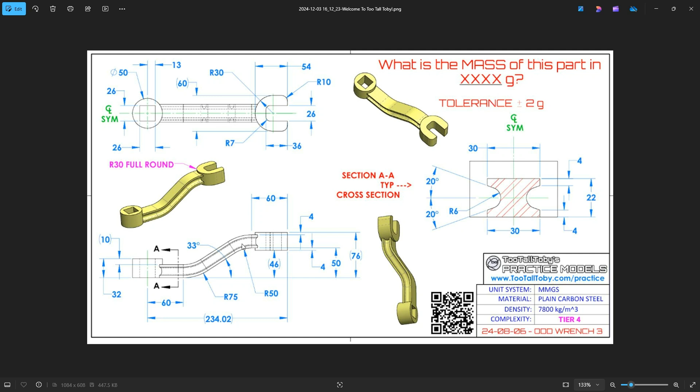This is not too awful complex, but it does involve some standard shapes that we'll use to place our start and end locations, and then we have to create a sweep path to basically create this model here in the top, or between the two, that has this profile on the right hand side. So not too over complex on this model. Just one key to mention is 234.02 to get this to work here smoothly with these tangents and everything. So let's just hop over to IronCAD and show you how this is done.

So this is the finished product of the model, so I'll just go ahead and show you how that is done. So I'm going to go ahead and delete that, and I'll start here.

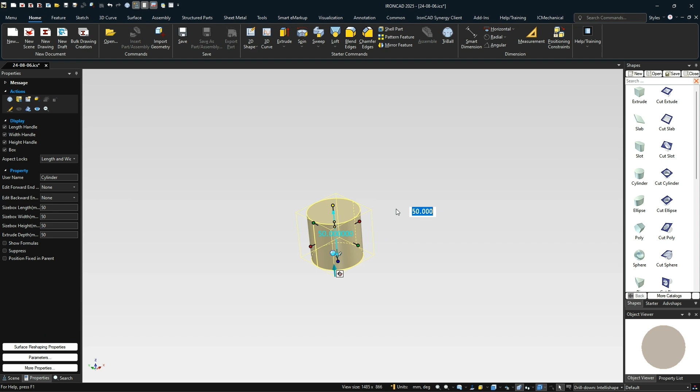So what I did to build this model is really just start with our catalog shapes, and I started with the cylinder out here to begin with, which is our base cylinder, which will give you a dimension of 50 for the diameter. The height of this is sitting at 32. So that gives us our starting point for that.

And the next, I'm going to drag and drop an extrude out here, and I'm just going to do a couple things here. I'm just going to slide it down here to the bottom, and I'm going to move this one. Just right click on that. I'm going to say go ahead and snap that to the center point of this, so it's aligned right in the center, and then we can set these values for this.

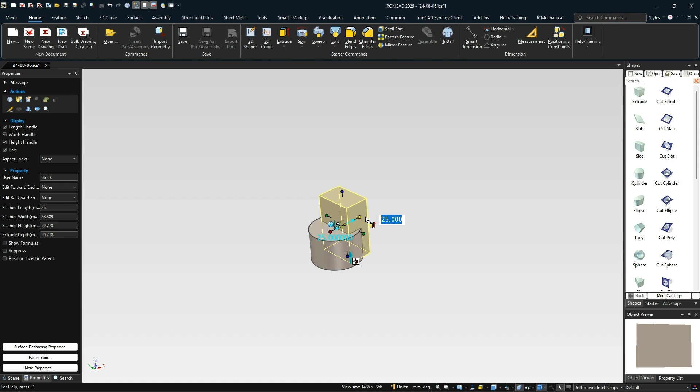So this cube, I'm going to actually move this one more time, so I'll show you why in a second. So this cube that they give you here is actually 54 long, so we'll go ahead and type 54 long, and in the width wise of this guy, we are sitting at, let me look at the dimensions here, we have 60 for the width, and the height of that guy is basically just a math formula of 76 minus 46. So that's our height for that thing.

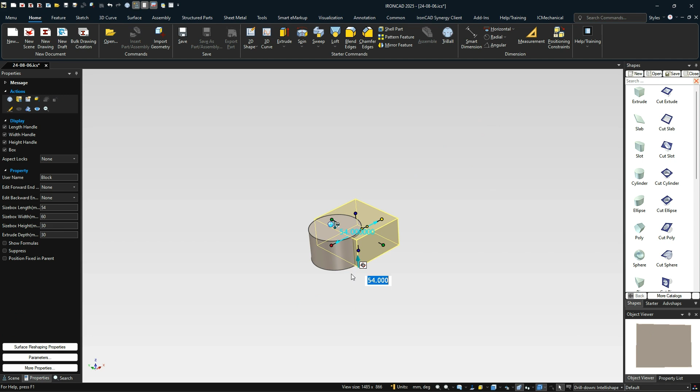So that's our block that we need to move out here to this new location. But the way this is positioned, it has that 234 from the center of this to the outside of this. So what I'm going to do is just turn on my tri-ball, and I'm going to move it down to the bottom edge of this part.

And I was going to do it an easy way. I just snap down to the bottom edge of this part, and I'm going to move it over to the far outside point here as well. And the reason I'm going to do that is I'm going to move this right back to the center point of this. So it's actually this one that needed to be on the center point, which we could have done initially. I just did the wrong direction. But anyways, we'll just continue on.

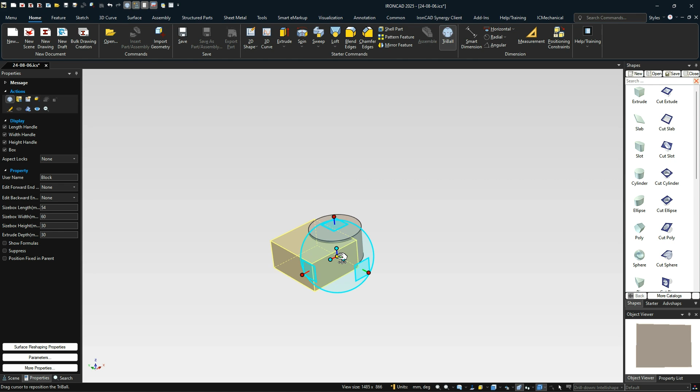So we've got this in the location where it needs to start, and then we just need to right click, move that out to the exact location that they give us, which is 234.02 for that dimension there. And it also, from the bottom of the ground to the bottom of the part, it is 46 units high, so 46 there.

So we'll go ahead and hit the 46 for that, because we've got our tri-ball at the bottom of this part, so the bottom to the bottom of this is 46. So that's an easy way to do that, or you could have done it from the top as well, to 76 from the top.

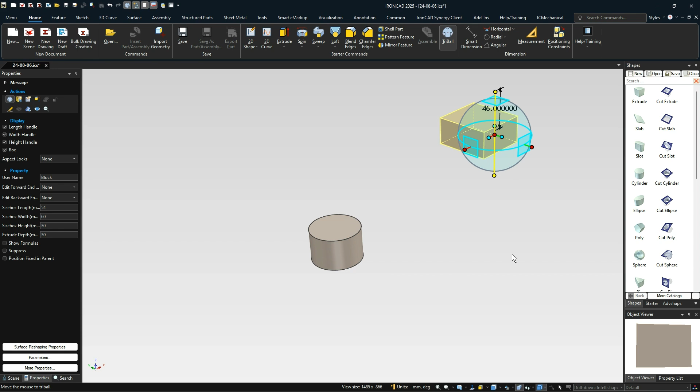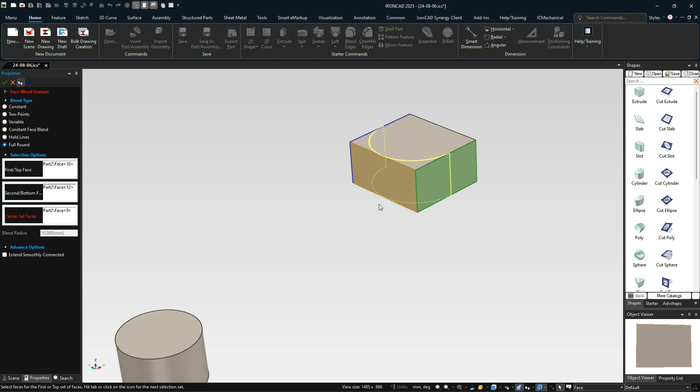So that's in the two positions that we have for this, and we can go ahead and add some other things that don't really matter here. So we can do these blends here, which actually are what they call a full round blend. So we have the top face here, and you hit tab, and I'm going to do a Control-Alt click to get to the other face there, to get the second face, and I'll hit tab one more time to get the center face. So that's just going to give us a 30, since this is 60 wide, that'll give us a 30 radius on that end there.

Next, these outside edges here are blended as well, so we'll just go ahead and put a blend on those, which have a radius of 10. So we'll just type in 10 for that one. And again, we can rotate around or just hit Control-Alt-click, and we're going to get that edge on the back side there. And we can say OK to apply that. So that will give us that shape.

So I'm not going to do the cutouts yet. I'll do those last, because we're going to build this model into here, because we have some dimensions that refer to that.

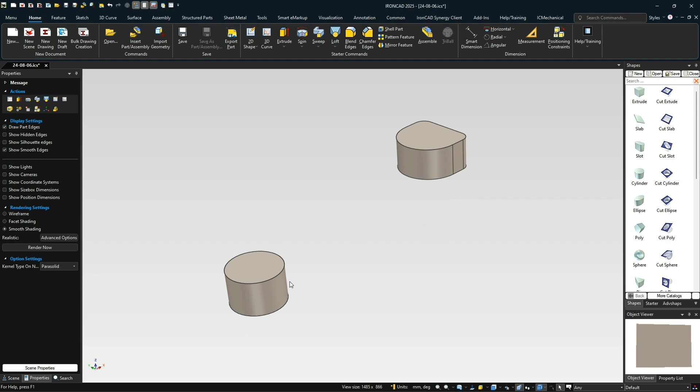So what we're going to do is create a 2D sketch for our path, then do our profile and sweep for this. I'm going to do a normal to face at this point down here, using the origin point at that location. So we've got the origin point here, normal to that face, and we can go ahead and hit OK.

This flips around, which is fine. We just rotate it using our look at tool, which is the F7 hotkey, or you can just click on it at the bottom there. Now we've got this the way we want it, and a couple things we know.

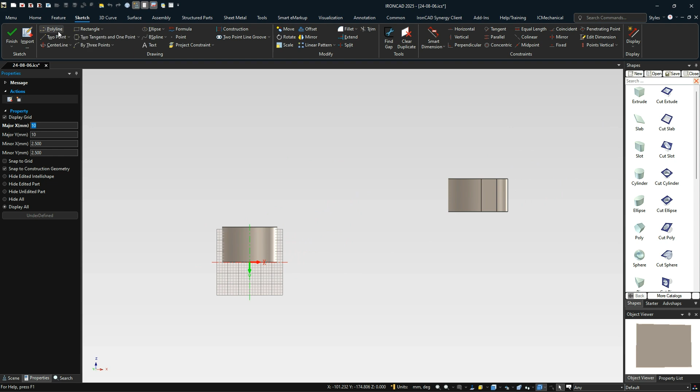First we'll go ahead and do 2-point lines here just to show this. I'll draw this line out here, and we know this side has a length of 60. We'll do the same from here, starting here—or you can move it if you like—and draw a line that's also 60.

One thing we know is this line has to be moved up. We're going to measure it from the bottom of that part. If we put a dimension from there to there, we want that to be 4 millimeters—that's the bottom of our profile to the bottom of this curve here. So that gives us our starting points.

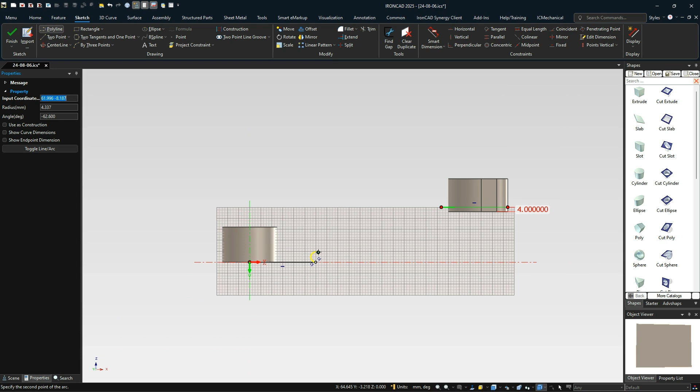Next we want to do a polyline. I'll pick our point and switch over to a toggle arc line, so we can draw this arc here. We move it out to draw like this, and place it up here by right-clicking on the mouse. The radius for that is 75, and the angle is -33. That gives us the location point for our first shape.

Next we want to draw that line from here, so we'll go ahead and draw this 2-point line. I'll just show you this—we'll draw that off, and you can see it gives us a tangency there. We draw it out to this location. If you want to do this with constraints, you can, or you can do it other ways.

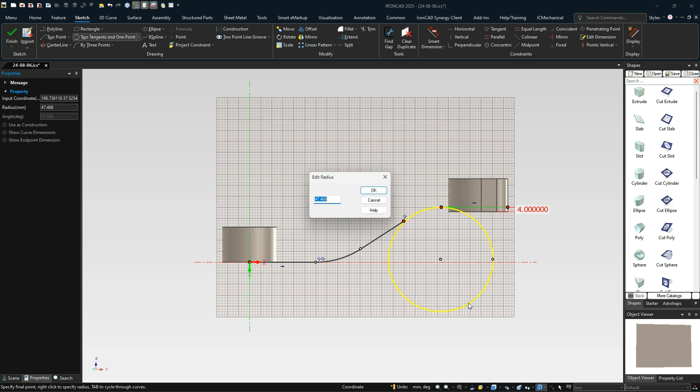But what we're going to do next is a 2 tangents and 1 point command—tangent to that curve and tangent to that. We move out here and right click, and the radius for this one is 50. That gives us that profile, and we can extend this curve, which should be tangent to that and connected directly to that point as well.

Now if we use our trim command right here, we can trim that arc so it trims directly where it needs to be inside there. You can put dimensions on this and add all the constraints, or just click on these to see the values for all this information. If you really want to, you can go and add all the dimensions just to show you've got this set up correctly—you don't have to, but it's good to set those there.

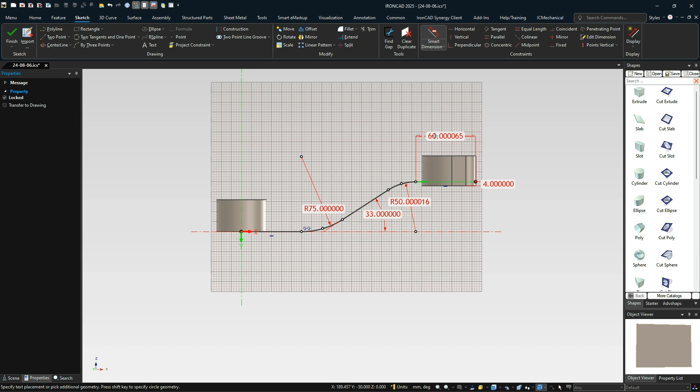It's just rounding to the nearest values outside of there, but anyway, those are the values for this. We can put this one on as well if you like—put the 60 on that too. I've got the tolerances pretty high at the moment. Oops, one more over here as well—we want not the point, we want the actual curve there. So you can see those values for the curve and profile. That is our path that we want.

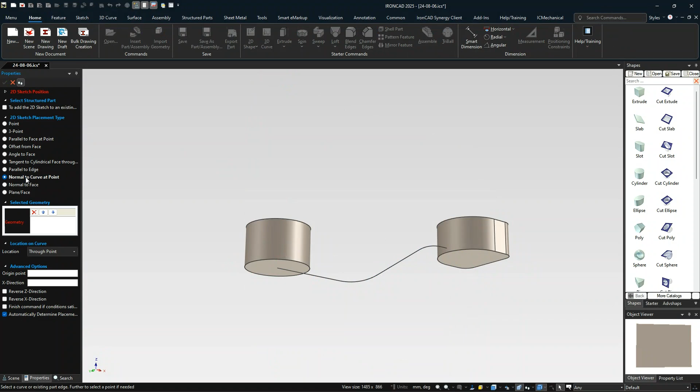So next we'll go ahead and hit finish to that. And next we're going to do another 2D shape, this time a normal to curve at point, selecting this curve. The easiest way to do this is to select down here and say arc length, which sets it to 0 and moves it right to the end for us, which is fine. We'll go ahead and hit OK.

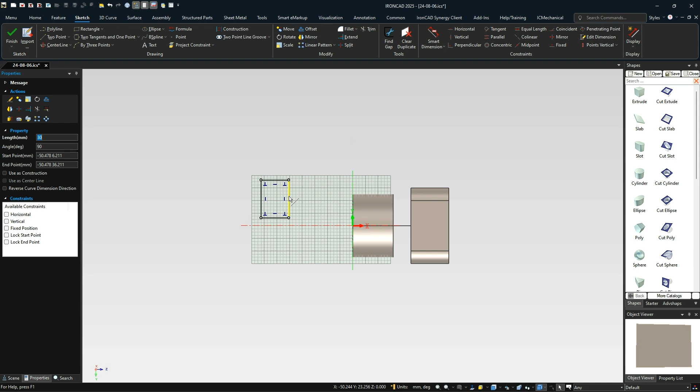The width on this is 22 and 30 on the side of this. This long edge here is our 30, and this is our 22 value. A couple things to note here.

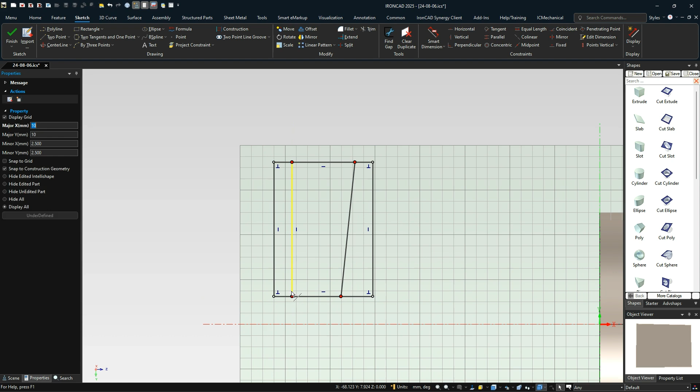There's 4 millimeters on each side of this, and it's at an angle from that location. So we're going to offset this 4 millimeters, selecting this curve here and this one as well to create those 2 profiles. Then we can simply drag these in a little bit, getting a hold of this one, and drag that one in as well.

What we can do is turn on curve dimensions if you don't have them on already. When you select on these you'll see the value there. So this one needs to be -110, and this one over here, we select this one, is going to be -70 to account for a 20 degree angle on each one of those locations.

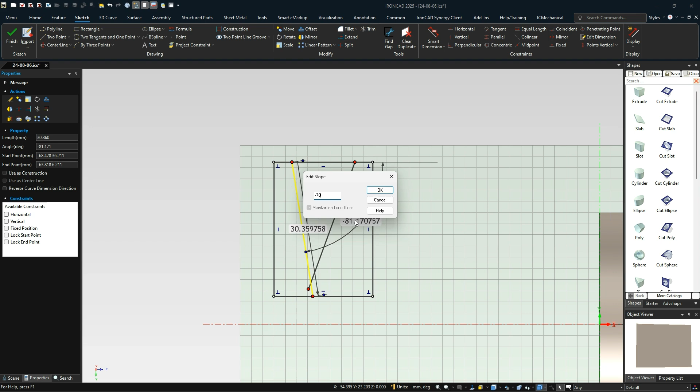Then we can just trim off these bottom 2 and add a fillet to our intersection point, which has a radius of 6 inside of there. So that's basically our profile that we needed to build, and we can trim off that middle section for that part. Now we just need to get this on the other end, so we can delete this profile.

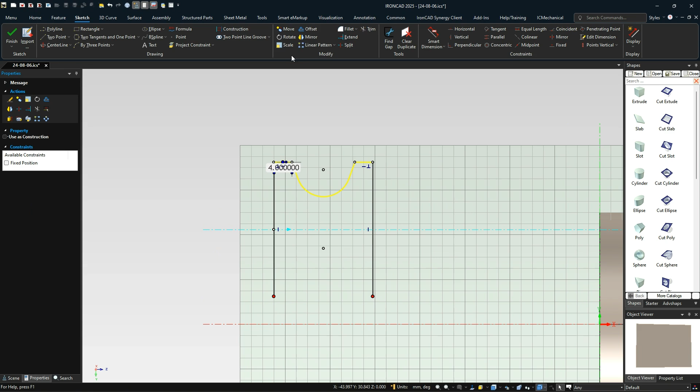We're going to actually put a center line on here first, right on the center of this midpoint here to there. Now we can do our mirror by selecting this, mirroring about this profile here. You can see the preview there showing where it's going. We hit OK, and that will give us our shape.

Now we can select all of this and use the move command. I'm going to hide those curve dimensions again so I can get my point. Move that down to this location, which is our start location, and hit finish.

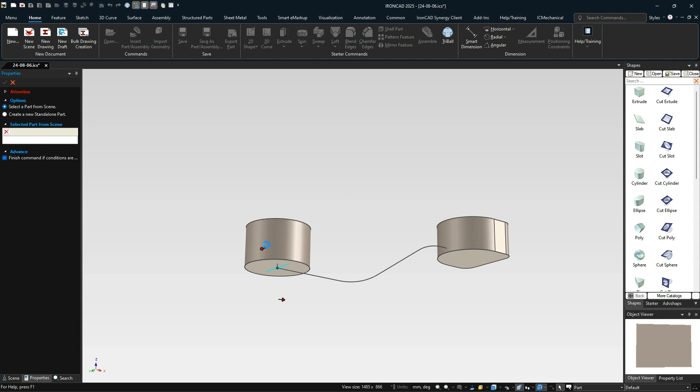That's our profile, and now we can do the sweep command, which will use this part as part of our part there. It's going to select our profile automatically since we had it selected, and we can change our guide curve to be this 3D curve we've created. That will create our shape for that model, essentially creating our sweep path and the smooth path on the bottom of this side.

Next we have to do just our last 2 cuts here, so we can drag and drop a cut onto this model. I'll just show you this - you can do it and extrude through, but we can do it in multiple ways, so we'll just drop this out here.

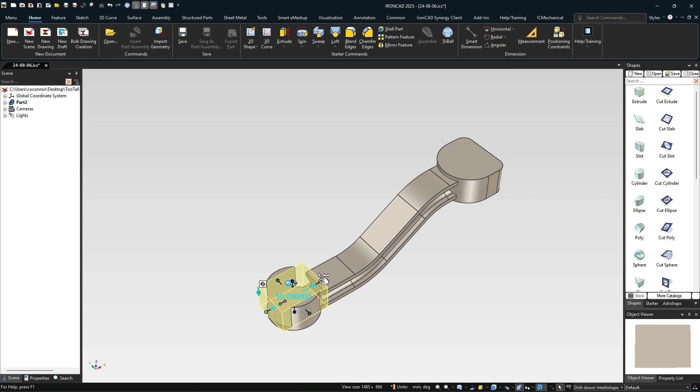We know this shape here has got a 26 by 26, so we can just right click and drag, type in 26, and do the same thing for these other handles, typing in 26. Either just pull this all the way through or snap it to the bottom side. So that's one for that shape.

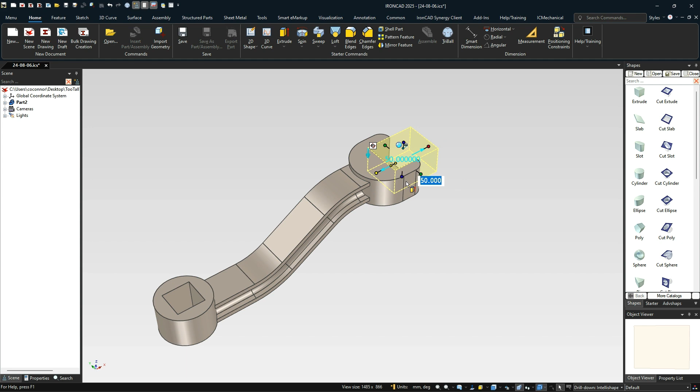We can do the same for this one, or copy that shape up there, or just drag and drop another shape to this location. You can line this up if you like - you don't really have to, but it helps give you some measurements. Again, the width of this thing is 26 inside of there. We're going to snap it down to the bottom, and we know the length of this is actually 36, so that gives us an exact dimension for that. We know it from that edge, so that's a good reason to align it there, so you know that exact dimension.

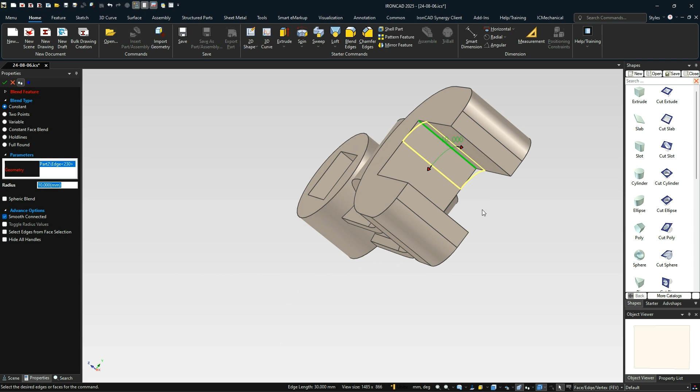Last, we just need to add one blend here that's got a 7 millimeter blend there and there. So I select that one and hit OK to apply that.

So that's all it takes to build this model in IronCAD. Basically what this will do is when you go to your properties with a 7800 mass density, they'll give you 1428 for the mass in grams. So that's how you can build that model here using IronCAD.

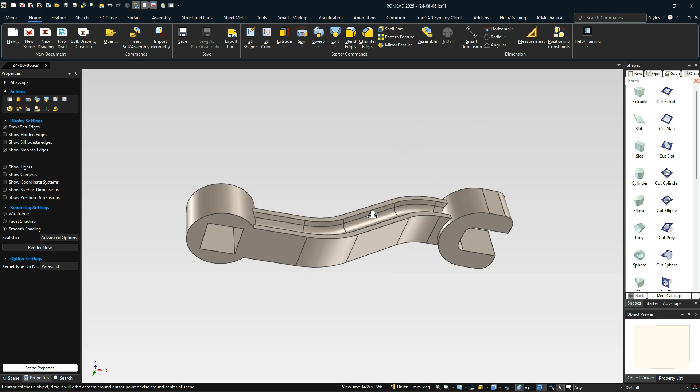Its capabilities again, using just a standard sketching here for the middle section and our drag and drop components, kind of mixing the best of both worlds here in IronCAD. Hopefully you enjoyed.